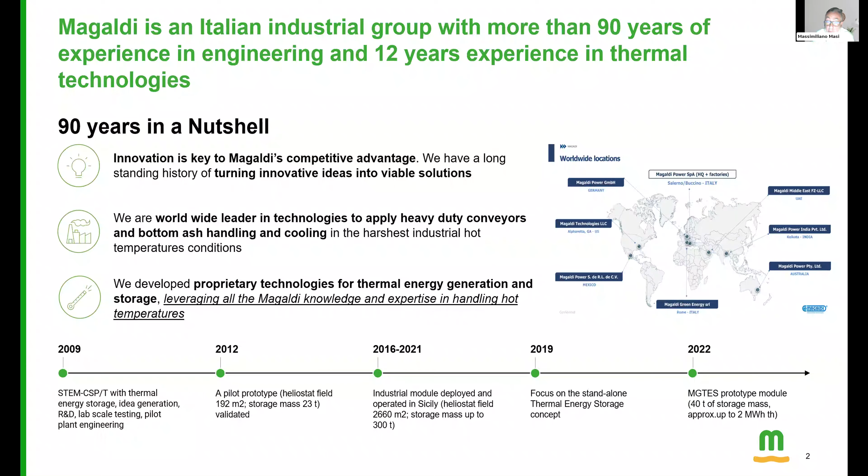We are based, we have also the luxury to be based in a very nice place - the Amalfi Coast in Salerno. And I will share a little video about our thermal storage technology that is located in our factory.

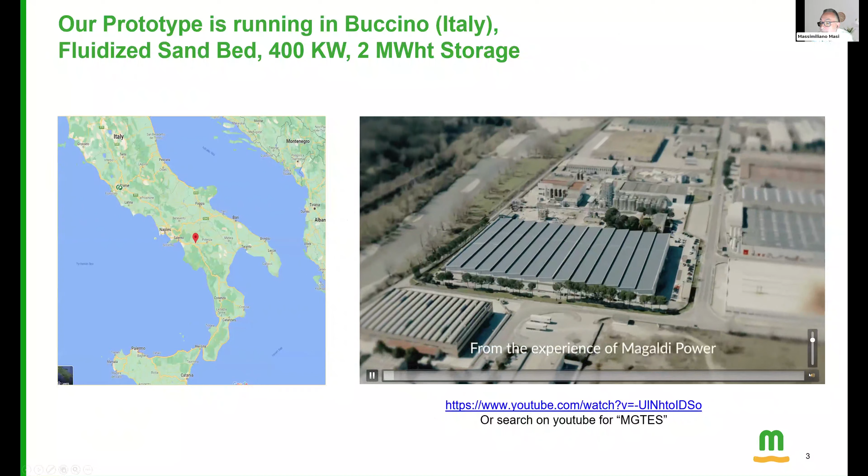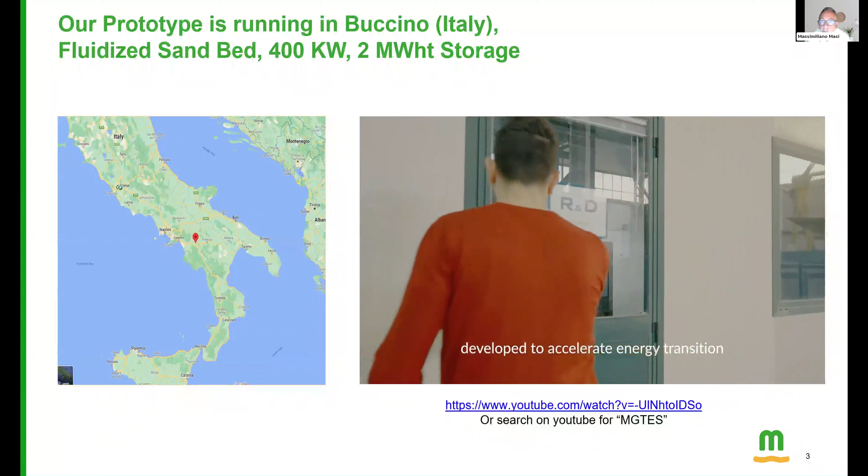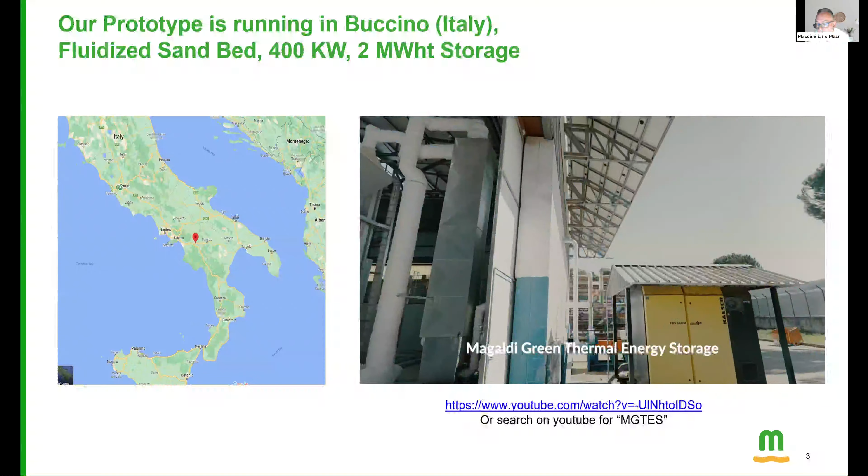As you see, this is our demo plant. It's a really significant plant because it's 400 kilowatt and 2 megawatt hour storage. We have developed all the software necessary to run it. We are working now to integrate this software with energy management advanced solutions to be integrated with the grid.

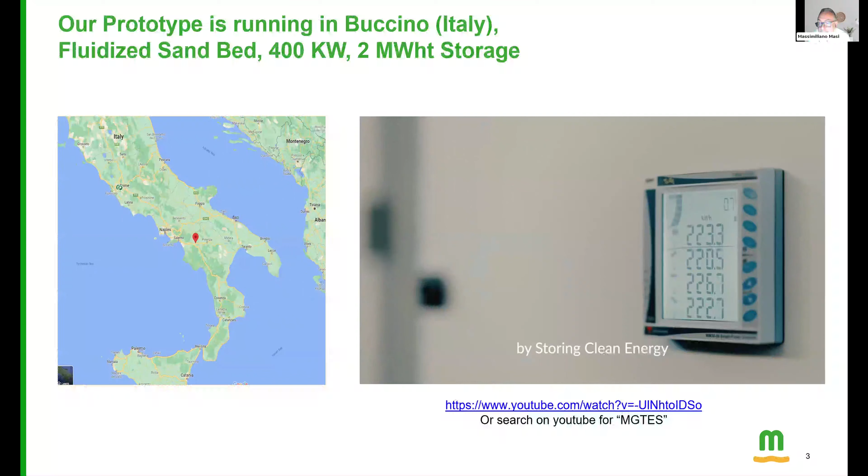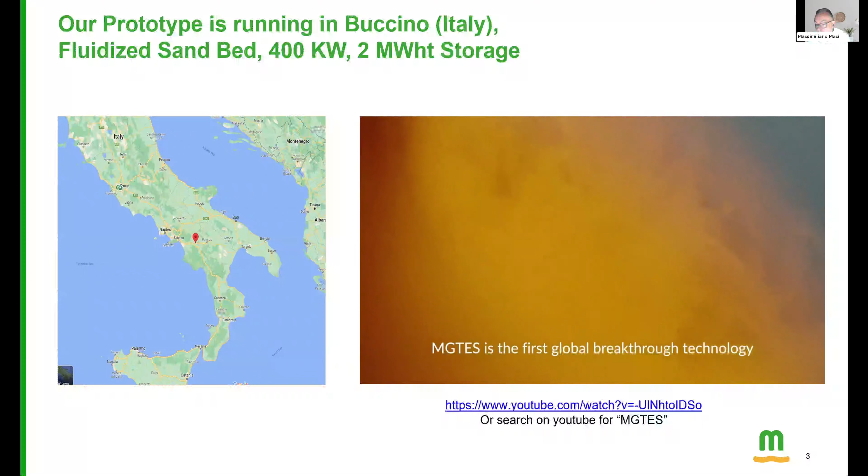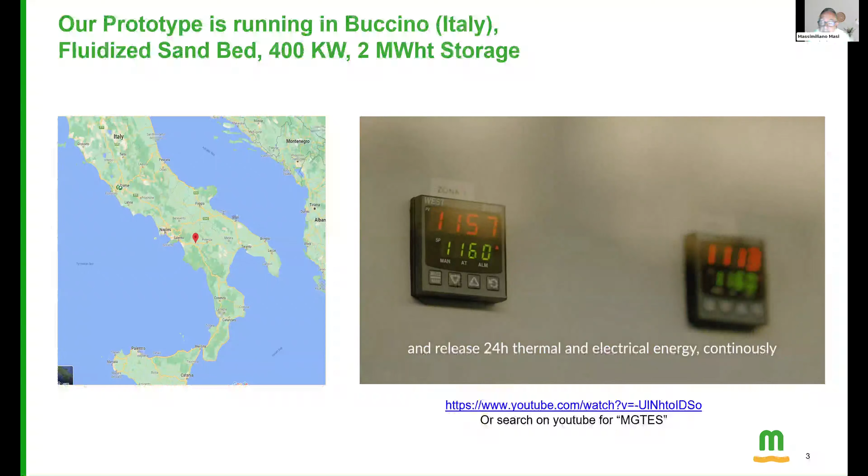The beauty of the sand is that it's a material that is able to be very flexible. Of course, it's available everywhere in the world. And the fluidized sand bed is our core patent. So we inject air into the tank, and you see the sand that is like boiling at 600 degrees. This injection of air multiplies the thermal exchange capabilities 1,000 times compared to steady sand.

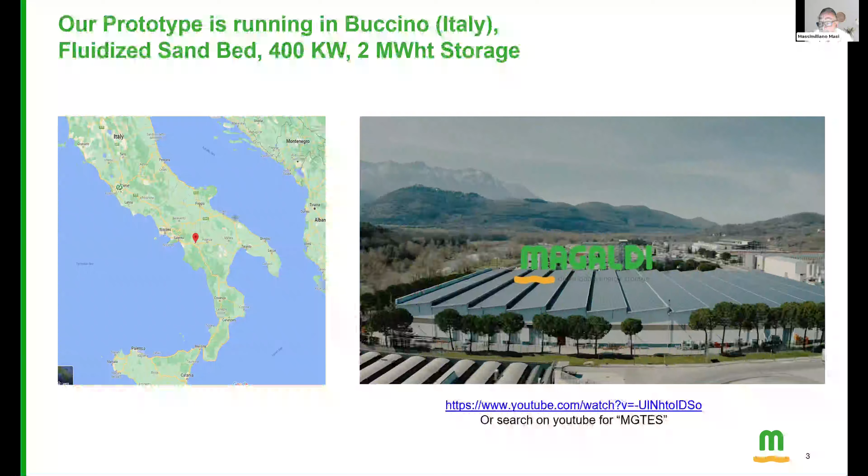So in phase of charge and discharge, we inflow this air, and the ability to scale up to high temperatures is in a matter of a few hours. This advantage has been included, has been started in the concentrated solar power technology that was proven in Sicily, and now is available in the standalone thermal storage.

We have discussed a lot about applications. For 250 years, all industrial sectors have used fossil fuels, so the space is huge. And the decarbonization, heat decarbonization is starting now. So our sweet spot, considering that we go up to 620 degrees in terms of temperatures inside the equipment, is, of course, temperatures around 150 degrees.

You see, we can cover almost all the industrial sectors. And because we have significant, huge storage capacity to leverage, also in the 150 to 350 range, we have a number of industrial sectors to be covered. We can go very easily to 10, 12 bars.

As we are seeing also in the presentation of the colleagues, we have a clear target into food and tobacco. We have, of course, chemicals as targets, but there are a number of sectors opening up also in the oil and gas auxiliary process that can be targeted. Moving into 350, 500 degrees covers less industrial applications, but still we are able to go there with less storage, but with higher pressures to be covered up to 50 bars.

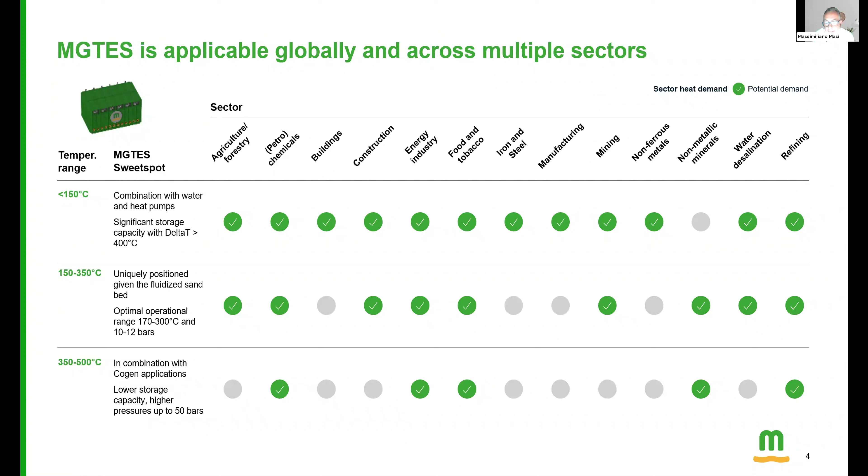So the market is immense. It's a market of trillions, and there are a number of applications that will be starting in our implementation in the coming months. So in terms of value chain, Magaldi is very historically positioned as an R&D engineering company.

We do also the design validation and also some component manufacturing. We are working with technology partners on some critical components. We are actively looking for partners in manufacturing, EPC developers, and we signed last year an agreement with Enel to bring to the market 3-4 projects, essentially in the industrial sectors that we are seeing around 150, 200, 250 degrees.

Our business model is quite simple. We will start with direct sales for the initial projects. We have very interesting pipelines already deployed, and then we will move into licensing because the market is so huge that the right partners, the right companion, will help to scale up fast.

So we have a tank. You have seen the tank in the video that is very modular, so we can cover different sizes, starting from the minimum one that is 125 tons that will embed 12 megawatt-hour storage. The 500 tons that is going up to 60 is already engineered. So we are ready also to scale up fast in the engineering of these solutions.

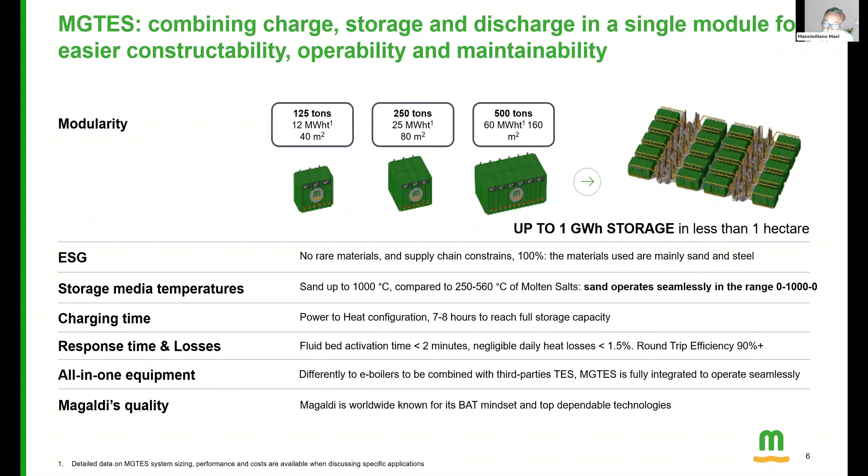So here is the roadmap. The prototype is up and running. We are doing the final validation with third parties and certification of the performance. Beginning at the end of 2024, we will have Beta X, as we call it. This is the plant that we signed with Enel and Ferrero, a supplier of Ferrero, close to our facility. It will be very easy to visit our facilities and this plant.

In 2025, we will scale up and go into full commercialization with larger plants of 6-7 megawatts and more capacity. Then probably from 2026, we will move into a globalization approach, leveraging curtailment opportunities that in 2 years will be much more visible than what we already see today in Europe, Scandinavian and northern countries, and other parts of the world.

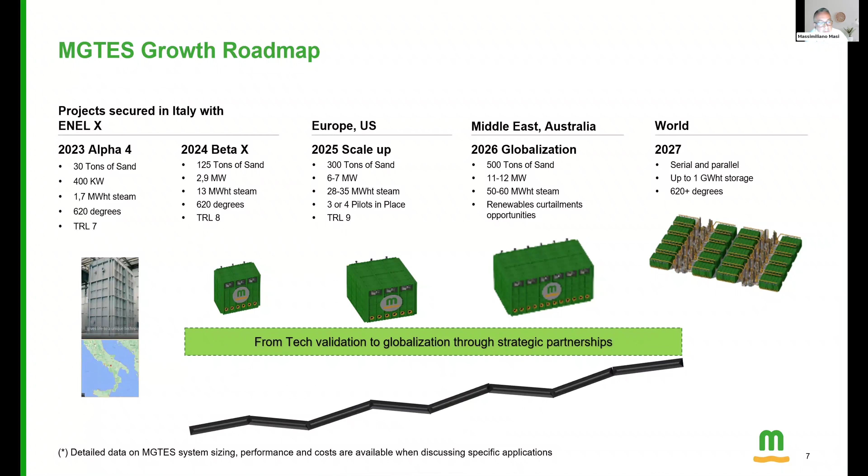And of course, the frontier, the next generation, will go to the largest storage capacity, and for us also go above 620 degrees. This is perfectly feasible because sand can go up to 1000 degrees, so we have room to increase the temperature.

So we are opening up, beginning 2025, an equity opportunity for investors. The market is huge. This is something that probably will really be considered by investors as not so innovative anymore. Two years ago it was probably innovative, but now, through this webinar, we see the technologies are there.

We can combine thermal energy storage with solar capabilities. We have a hybrid technology coming up soon, combining solar concentration and thermal energy storage.

We already have an organization in place, a very robust business plan that we have finalized recently. We can cover all geographies. There is huge potential for growth and scalability by combining modules, and at the same time we already have a consistent backlog with a number of different players in different sectors.

Magaldi is an experienced company. We have a management team of more than 20 professionals working full-time on this. The company will grow, and we already have established and operating companies in the key markets: Italy, Middle East, US, Mexico, and with Italy we cover the entire European playground.